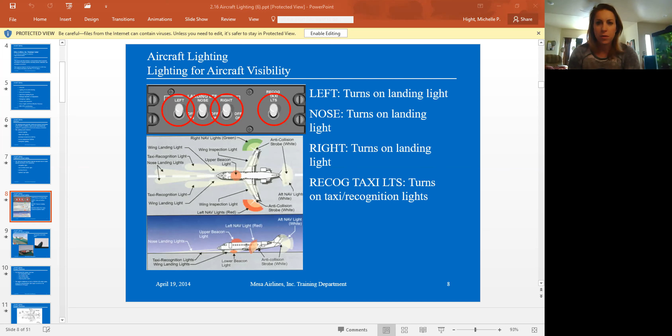I'm going to make my face smaller here - I like to be able to make gestures for those who aren't here. Left turns on the landing light. Nose turns on the landing light. Right turns on a landing light. And then this also turns on taxi/recognition.

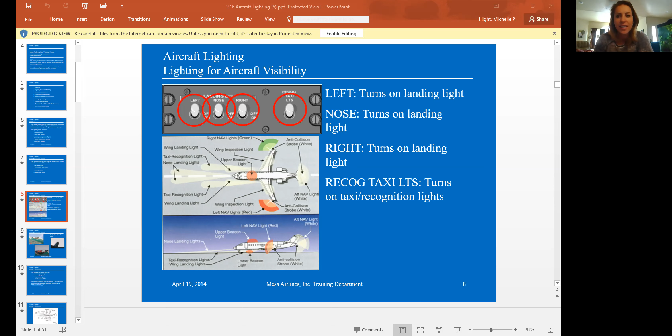So to illuminate the outside, you've got all these things: wing landing, wing inspection. Who would use a wing inspection light? Is that for your wing walker when you're flying, the girl who gets out on the wing? No? It's for ice, someone said it, yes. If you have ice, you can take a look on the wing, or if you think you've hit a bird or something, sometimes it's visible. I can't imagine it would be very useful in a CRJ, but in a C-130 it's pretty good because the wings extend straight out from the fuselage and you can see them very well.

Wait, so who would check that? Your flight attendant, me when I was flying, or you guys? No, for us. If we were the pilot in command and had an issue, we would tell our flight attendant to go check the wing inspection light, to look out the window. I honestly don't know how the crew coordination would go for that. You might be able to see back far enough. I've sat in the cockpit and I don't think so, but I think you can see the very end, so I suppose you might be able to see them if there's a little bit of icing on the tip. So good question though. I'm sure you don't rope the flight attendants into checking your wings. When's the last time you saw a flight attendant lean over a passenger and open the window and look out? I don't think so, they've closed our windows.

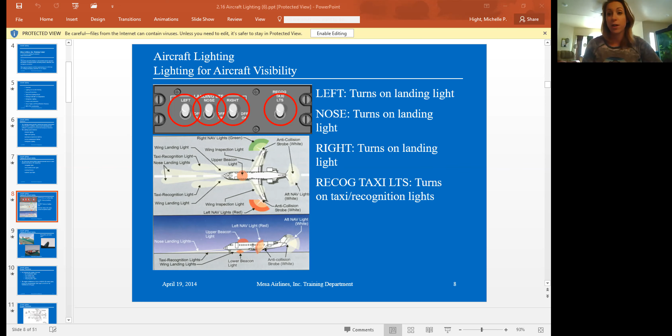Okay, wow, this slide is definitely deep. Real important stuff here. Strobe turns on. It's not moving, we can't see it. Oh, it's not, dang it. We're gonna have problems with my video. Oh, there we go. You know, so basically if I'm in slideshow view it freezes, so I won't do that.

That's really it for lighting. There's not a whole lot more other than when you get to wherever you're training, you're gonna do a walk around, you're gonna look at all the lights, make sure there's no bug splatter.

What is that airplane? Wait, what is the paint scheme on that one? Oh, that's an old America West paint. Okay, I was like, who owns that? Way old, that actually, Mesa Airlines used to fly for America West. Well, look at the Southwest jet in the background, the brown one. Yeah, like old school, it's OG.

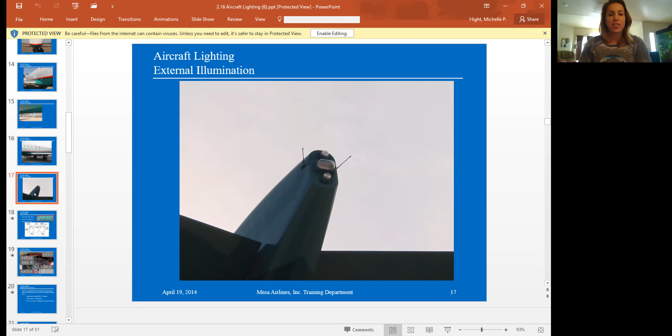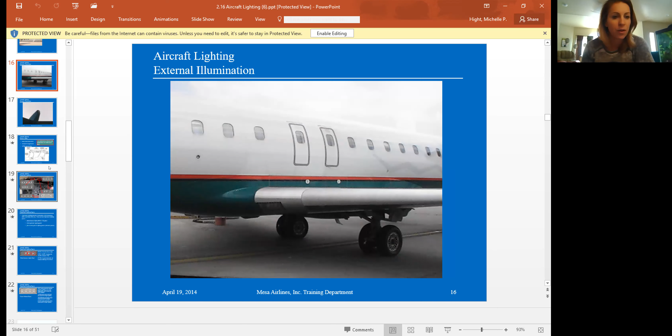So actually, I have actually called maintenance a couple times because, say, the sortie before me, they were flying low level down a riverbed or something. I've called maintenance to clean my windscreen again, and to clean off my lights, my taxi lights. If I was going to be the second turn of the day and somebody had done daytime low level, maintenance wasn't very good about cleaning off lights. So you check that there's no bugs. I can't imagine a CRJ flying low enough to get a whole bunch of bugs, but you never know.

There's some places. Okay, so those are all pictures of it. Service lights powered by the battery bus, so remember that one, that's an important one.

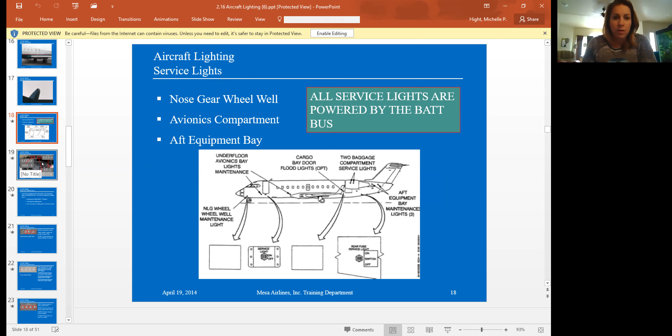There's the flight deck lighting. This to me is not worth you guys truly memorizing everything because you're going to sit down and in about one sortie, especially a nighttime sortie, you're going to learn where all this stuff is. I would just say be really, really careful with the dome light.

You see where my mouse is right here? Are you guys seeing my slide? Yes, okay. The dome light can kill you, at least in a Talon 2, and I'm pretty sure, say you're flying a really dark night approach and somebody does not pay attention to this dim bright switch, flips on the dome lights. I've heard of stranger things than pilots having to go around because now they can no longer see anything. Dome lights can be very, very blinding. The rest of this stuff on rheostats, usually pretty dim. You don't have to worry about anything blinding you except that one very, very powerful switch right there.

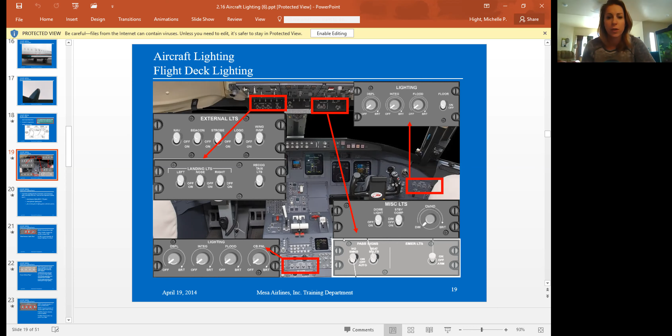I come from a background where lighting was the evil enemy. We had night vision goggles and we had to have 30 minutes of just absolutely no light in order to see properly. So if someone flipped on a dome light, it could be a really bad day. So anyway, flight deck lighting: you've got the miscellaneous lights panel, center pedestal, pilot and co-pilot.

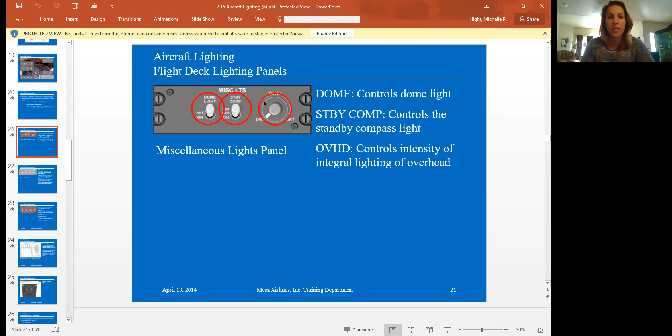Okay, there again, the dome lighting. The overhead, this whole thing controls intensity of lighting overhead. I don't like the dome light.

I wouldn't do it. You have a couple lights down at your feet, the floor lights. Oh man, those are so important. Know where those are before you go fly at night, because you're gonna drop something like a chart or a pencil or something you need. And if you don't know where the floor lighting switch is, it could be very awkward trying to figure out where you dropped something.

Okay, map lights, really no longer a factor these days. We're all using iPads, so you're probably not going to use the chart holder or the lighting, unless we're over the middle of the Atlantic Ocean and all of a sudden we lose all of our systems and we have to whip out our Jeppesen charts.

I would say, I don't know if airlines issue these things, but on your headset, I wish I had my headset. Has anyone been in my office? My headset, I've got a lip light on it. Have you guys seen these things? Do you have them at Riddle? Nope. Oh gosh, they're awesome. Will you get your headset and show us? I'm not going to go home. Are you kidding me? Oh, it's in your office? You don't have like a second one hiding in your home?

No, but on my David Clark's, I don't know if you guys wear David Clark's, they're really good headsets, but there's on the boom, like an aftermarket jury rig zip tied lip light. Those things are money, because if you want to look at something, just hit your boom against your face lightly, and then you look around. The only issue with the lip lights with new co-pilots, hint hint, if you're looking at the other pilot with your lip light on, you're blinding the other pilot. It's rude, so there's like lip light courtesy. So anyway, long story short, buy yourself a lip light. They're cheap. You can safety wire it on, and there's a little tiny battery pack that you stick on with double-sided tape onto your headset, and you'll be like the smartest person ever when you're flying at night.

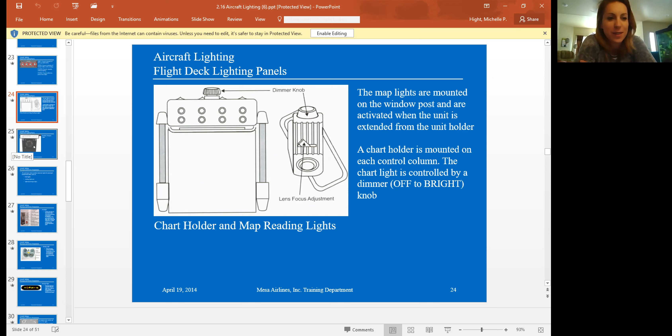Okay, you airline pilots, I don't know about y'all. No lip lights, I also had finger lights. To be fair, we are not airline pilots, we are all student pilots. But I consider you already having succeeded in advance. I just know you all are going to be just fine. Yeah, there's still an industry left for us to join. I know, I hope it'll rebound.

It'll rebound. So anyway, they're still like $60. What is, $60 for the lip light? Oh really? Yeah. Oh, the Air Force bought me mine, so I guess I didn't know it was that expensive. The Air Force buys your everything. Yeah true, I actually still have rain jackets and boots and all kinds of stuff. Ooh, it comes in green too.

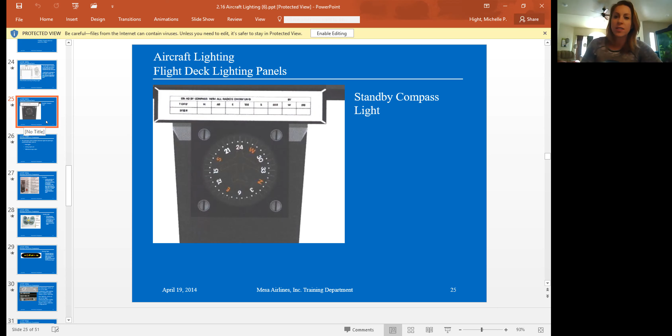You should totally send that link out, an announcement, because I swear by the lip light, especially if you're going to be one of those co-pilots that volunteers for the 3 a.m. takeoffs. I can't tell you how easy that thing makes your life at night. I haven't flown in the sun in like a year. I think I'm gonna get one, these are pretty cool. Yeah, I had the 6 p.m. to midnight instrument flight block, and that's what flights I have right now, like 9 p.m., I have like 3-day flights, and I'm done with my instrument. Yeah, that's pretty much it. Well, get yourself a lip light.

Okay, so the passenger cabin contains numerous lights. Yes it does, floodlights, reading lights, lighted passenger signs, and of course the emergency lights. You've got all these things that the flight attendants can control, they can do ceiling, sidewall. I didn't know that they had control over all these, but now that I went through Mesa, I did.

Has anyone been on a Dreamliner lately, or a really brand new A330? I have, on my way back from Orlando to Phoenix, it was a Dreamliner. Did they have the flag? Was it American or what airline? Maybe it was. I flew American on the way there from Phoenix direct to Orlando with American Airlines. We got on a brand new plane, and they had an American flag, it was flashing red, white, and blue. It was pretty cool, yeah, on the side, like where you're under your baggage.

Well, some of them were ceiling, sidewall, flashing up and to the side and down. I thought that was really cool. On a Condor flight, I had to fly from Phoenix direct to Frankfurt, and they had lights that looked like the gay pride flag, all the colors. It was cool.

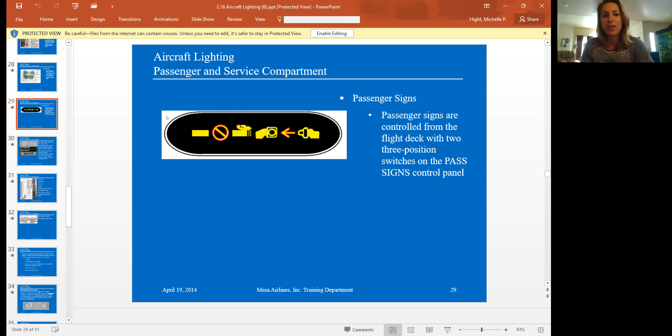Moving on. So I think what we're doing with this cigarette sign, since everybody knows the cigarette is going away, is that there's going to be an electronic device in place of it in the future. If you go on a Dreamliner or something really new, try to take note of what's up here, because I'm pretty sure they've taken that off. I noticed some new ones are just printed on, it's not light up anymore.

Interesting. Yeah, so obviously it doesn't go off and on. It's like, oh well, we've reached 10,000 feet, it's okay to smoke now.

Anyway, I know this is crazy, but in my lifetime people would smoke on airplanes. When I was a kid, we had disgusting trays inside the armrest, these cigarette tray things, and they were full of gross stuff. The only thing I remember from our lifetime was being young and being in airports that had designated smoking boxes, filled with cigarette smoke, disgusting, you could see people smoking in the airport. I still remember the dash trays on the armrests, those too, but they were empty. I could see residue, mostly discarded gum.

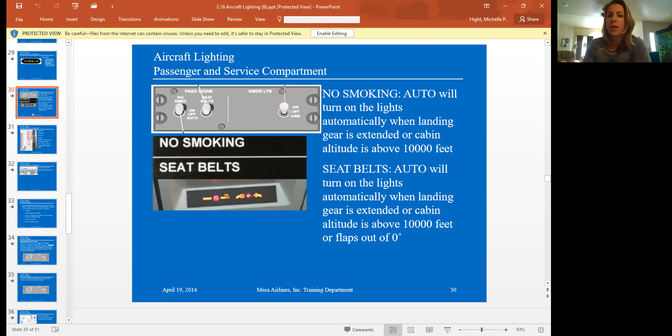So it's 3 conditions in which they become auto. Anytime the landing gear is extended, so you're getting ready to land or you've just taken off, cabin altitude is above 10 grand, which it should never be — cabin altitude should never be above 8,000 — or the flaps out of 0. So basically you have to go on with them for the seatbelts. The no smoking sign is auto when landing gear is extended or cabin altitude is above 10,000 feet. So I think what they meant to say, instead of cabin altitude on this slide, is aircraft altitude.

Yeah, because it dings, it comes on at 10,000 feet. I think that's a Mesa slide problem there. I want to ask you about that, but still.

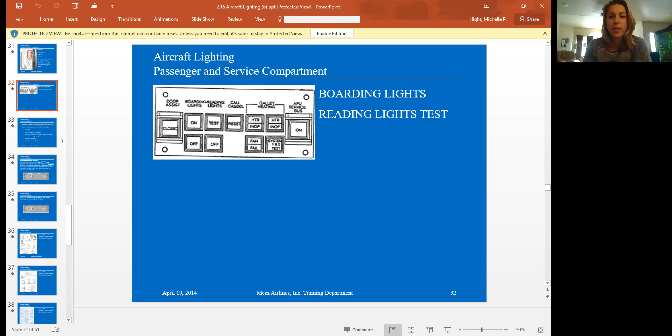Boarding lights, reading lights. These are old pictures, but they're still old school switch lights on the 600 and 700. The 900s are phasing into digital, but I haven't seen any of the new ones yet.

So emergency lighting, kind of important to understand when this comes on. It turns on your exit signs, the emergency floodlights on the ceiling. It basically lights the place up like a Christmas tree and then turns on the exterior emergency lights too.

Are those like the floor lights for the passengers? The rechargeable battery powered emergency lights. Like the floor lights, if I don't know, I just think of the movie Sully where the floor lights illuminate and you can see it through the water when the plane's filling up.

Yeah, there's more to it than just the floodlights. Aren't the exit path lights also usually glow-in-the-dark strips instead of lights, so they don't require power to lead you to the exit? That's a different one. Those are the ones that come on with the battery power.

So in the arm position, emergency lights come on when electrical power is removed, and that's why they have to be battery powered. Like I said, 10 minutes of battery power for these, and they're not super bright, but they do help you get off.

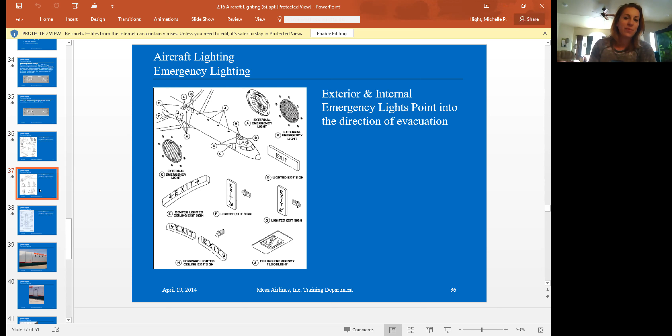They should really make a movie about the Southwest pilot who landed that plane, she killed it too. That's the one where the window blew out recently and the passenger died. According to Professor Waldock, she was dead before they got her back in the plane, because she probably broke her neck as she was thrown out the window, back first, so the window itself probably broke her neck first. That's awful. I think though, to make a movie about someone like that, you have to have their permission, and I get the impression she's kind of a private person, but we'll see, maybe someday.

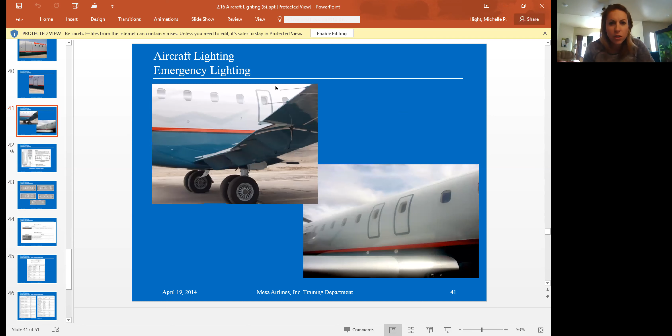On turns on all emergency lights immediately. Off prevents them from coming on, and arm means emergency lights come on if AC or DC power is lost. So you can either fly them on or off, but you're usually going to fly them armed.

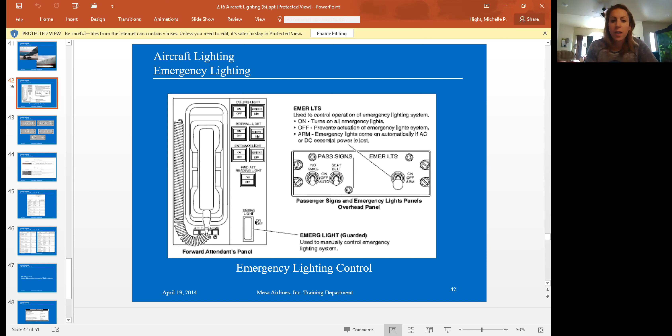One question I remember straight out of the quiz bank is, because the flight attendant has an emergency light button, so she or he can turn on the emergency lights, can they turn them off when you have the lights selected on up front? Nope, the flight attendant cannot override the pilots. If you have the emergency light switch on, they can't turn it off. So if I turn it on, they can't turn it off, but if they turn it on themselves, they can then turn it off.

So the key point is that when they turn them on, say you have them off, they can override you to turn them on, but they can't override you to turn them off. Only the pilot can turn them off. Correct, if you have your switch in the on position, they can't turn them off. Okay, hopefully that was clear enough.

Emergency lights off: if the emergency lighting system has been selected off, it's actually a caution, so that is not a normal switch position. Here's your circuit breaker panel summary, nothing you have to remember or worry about at this point. Then there's an MEL on cockpit flight compartment instrument lighting systems. I guarantee if we look at the MEL, we'll find that you can't fly in instrument conditions or at night.

Passenger evac, this is an interesting QRH checklist to take a look at. Advise tower if you can, parking brake on. Ground lift dumping switch has to be manually disarmed. Thrust levers shut off, depress. Evacuate, evacuate, evacuate, you have to say it. Emergency lights on, so the switch should be on. Even sometimes in emergency evacuation, you won't have lost all power, so you will have to select the switch on. Then the APU, engine fire push switch, select them all. This is all part of shutting down in emergency evacuation. And then the battery master switch off.